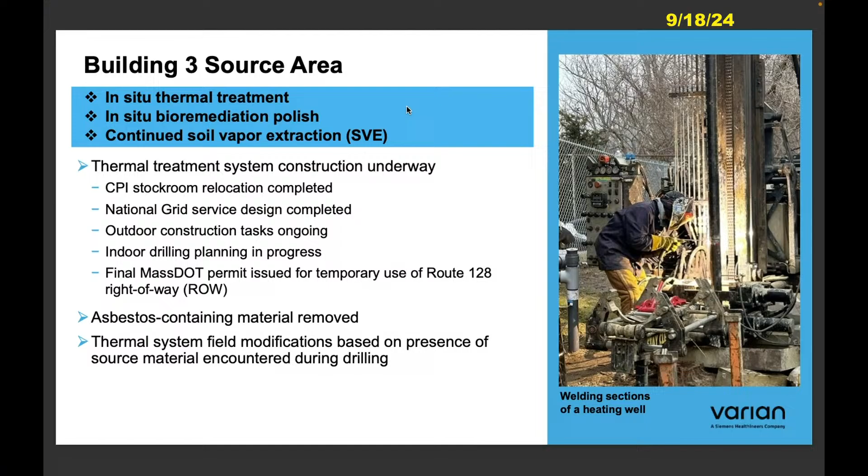The final piece is we're looking to get things moving with modifications to the building's ventilation and heating system, as a result of some of the drilling observations we've made outside. Let's go to the next slide on that.

We identified and encountered this material towards the late portion of May. When we hit it, it was an obvious point to pause because we were getting prepared to do that ACM removal, so we put things on hold. It also identified, when we were out drilling, that we needed to do a little bit more associated with the ventilation around the building and the proximity to the space. We wanted to make sure these provisions were in place before we took drilling operations indoor.

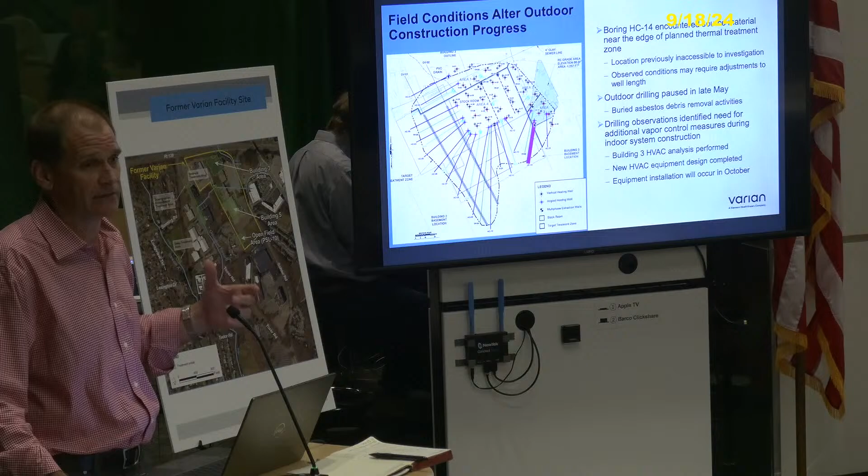HC14 was outdoor, and as a result we've subjected the building to additional HVAC analysis to look at airflow and air exchange. We felt that to get into that stockroom space and maintain safety of the employees doing the work, as well as CPI operations, some changes to the HVAC equipment in that portion of the building were necessary. We're working through the final design phases of that.

The equipment's been ordered. We're looking to implement and get that equipment installed toward the portion into October. Let's go to the next slide.

Overall construction status: the HVAC system is underway. We're looking to restart construction and completion of HC14 and HC13, the two remaining outdoor borings, in the mid-October timeframe. Once we're completed there, we'll take those drilling operations back inside and look to progress the rest of the system construction from inside the stockroom.

Some work will be occurring along 128 in the weeks ahead to move that fence line and do some grading to prepare space for the overall staging of the remediation equipment. Once we're back into the stockroom, our drilling operations will begin, looking at about a 6-month duration to get that indoor drilling work done.

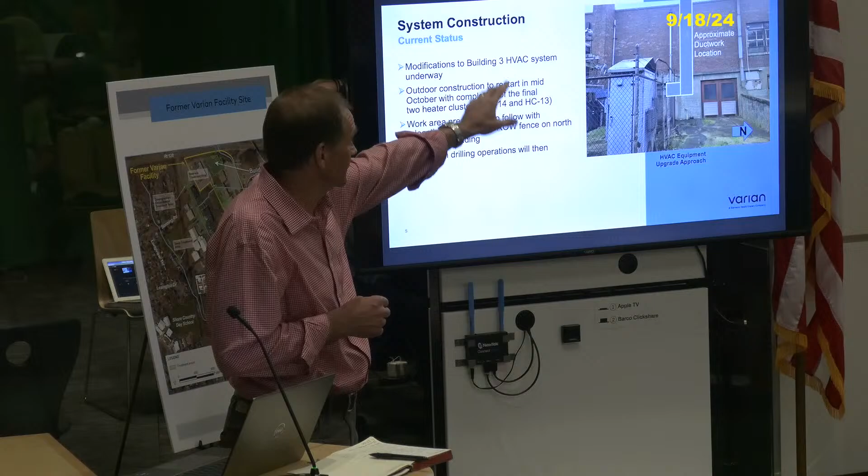This is a schematic of the ducting, which is going to come up the side of the building, up to the roof to move as part of the ventilation and air exchange systems that we felt were necessary to get into this building space.

But this is down at the basement level. The HC14 boring originates around where that north arrow is, projecting underneath the foundation and diagonally in under the space. Very constrained space to get in there, but we wanted to make this change before we got any further along, and the asbestos abatement really gave us the opportunity to get in and do this.

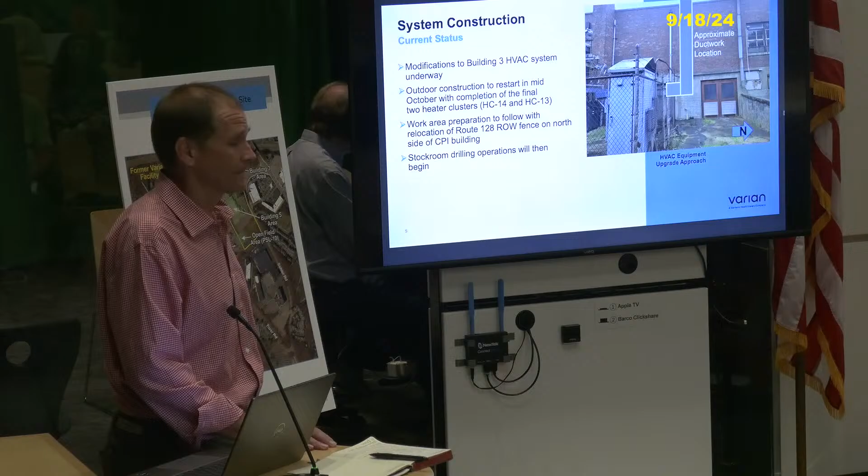So now we're ready to move forward to wrap these locations up and then move inside. So, Lauren, thank you.

Hi, for those of you who haven't met me yet, my name is Lauren McKinley. I'm also with Jacobs, and I am the project manager for the Tozer Road portion of the project. So I'll be talking to Tozer Road, and just as a reminder, Tozer Road is right here.

It's down gradient of the source areas. So as a reminder, the remedial option that we will be implementing at Tozer Road is a permeable, reactive, and adsorptive barrier. And this bottom diagram shows how this barrier will work.

In this diagram, the barrier is depicted as the purple oval, and groundwater flow is shown as the blue arrows. So as groundwater flows down gradient from the source areas, it will move through the barrier, and when it hits the barrier, it will trap the contaminants, treat the contaminants, and allow groundwater to flow through. It's important that this isn't going to stop the groundwater flow. It's going to allow groundwater to continue flowing through, but treat the contaminants and stop them from migrating further down gradient beyond Tozer Road.

So in order to get to the installation of the barrier, there's things that we need to do. We need to conduct some investigations that will provide us additional data. So we've collected high-resolution data, soil and groundwater data, and we're still continuing additional investigations. Once we have all that data, then we'll be able to refine the design of the barrier.

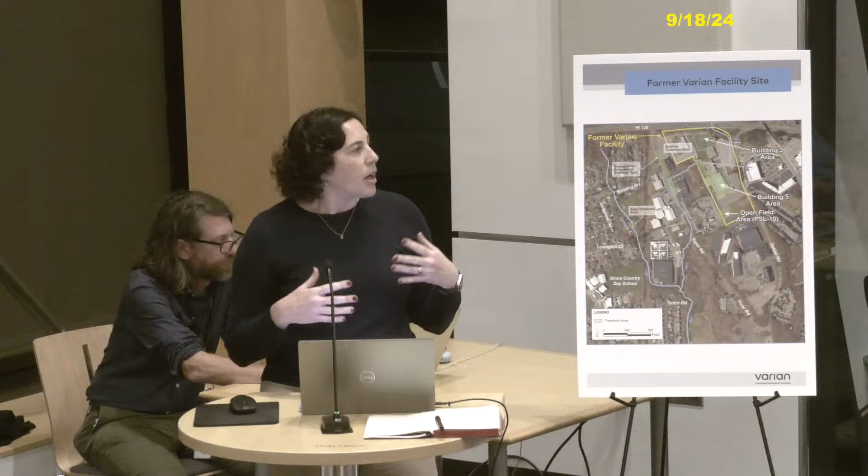Once we know the location of the barrier, then we'll be installing some new monitoring wells, both up gradient and down gradient of where this barrier will be installed, and these will serve as performance wells. We'll collect groundwater samples from these performance wells so that we can get a baseline sample and compare that once the barrier is installed.

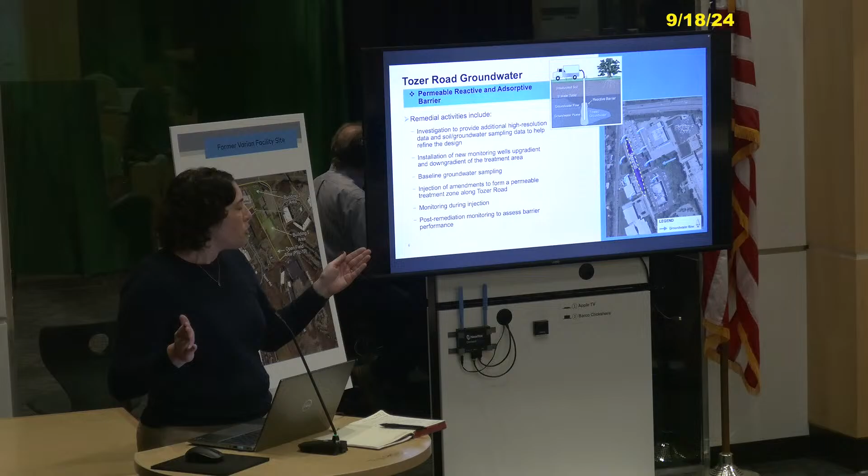We'll then begin installing the barrier through injections. The top diagram illustrates how the injections will occur. In the area where the barrier will be installed, we'll be drilling approximately every 5 feet down into the water table, and through these boring points, we'll inject the amendment into the subsurface. The spacing is such that as this amendment is injected at different points, it ultimately overlaps so that you end up with a permeable treatment zone in the area of injection work.

We'll be monitoring the whole time that we're doing this injection work. And then once the injections are complete and the barrier's been installed, we'll go into what's called post-remediation monitoring, where we'll collect groundwater samples from the performance wells that we had installed prior to the barrier installation. Next slide, please.

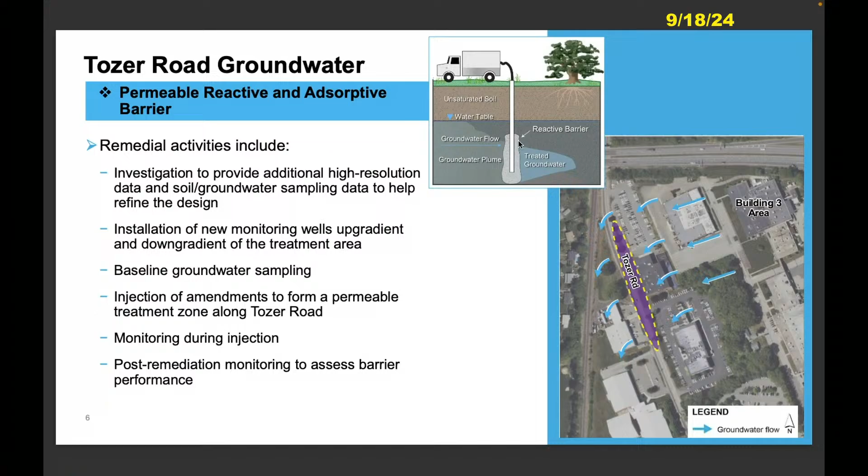So right now we are in the midst of pre-design investigations. This is important. We need to get additional data so that we can refine the design of the barrier and make sure that we're installing it in the optimal location to treat the groundwater as it flows down from the source area.

To date, we've completed what's called a membrane interface hydraulic profiling tool investigation, which is a mouthful, so we refer to it as MiHPT. This was done over a long span of Tozer Road, from 16 Tozer Road down to 39 Tozer Road. This is where we collected a lot of high-resolution data, and it gave us information on contaminant concentrations, distribution, and how groundwater was flowing.

Following that, we went back out and did some additional drilling activities. We installed 7 temporary soil borings through a method called direct push technology drilling, shown in the top picture. When we did these temporary borings, we collected groundwater and soil samples, and that picture shows us purging some groundwater before the collection of a groundwater sample.

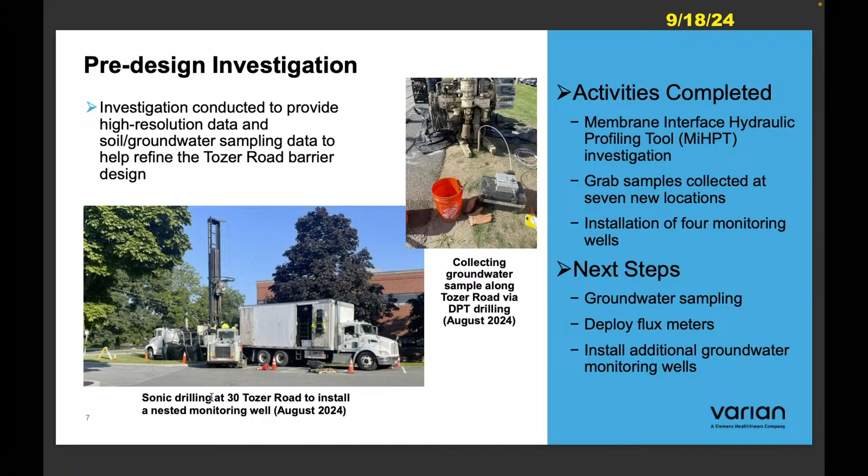So next steps, some of the next immediate steps we'll be conducting is going back out to collect groundwater samples from the newly installed wells and some existing wells. Once that's complete, we'll be deploying flux meters down 4 wells. These flux meters will stay in place for 2 weeks and collect data that will help us understand where the greatest mass of contamination is flowing through Tozer Road. That work will be conducted in October.

Once that's complete, we'll have all the data we need to refine the design of the barrier, and at that point we'll know where the optimal place for the barrier to be installed is. Then we'll be able to install the additional groundwater monitoring wells, which will serve as the performance wells and collect our baseline samples. So that's the update on Tozer, and now I'm going to pass you over to Carol.

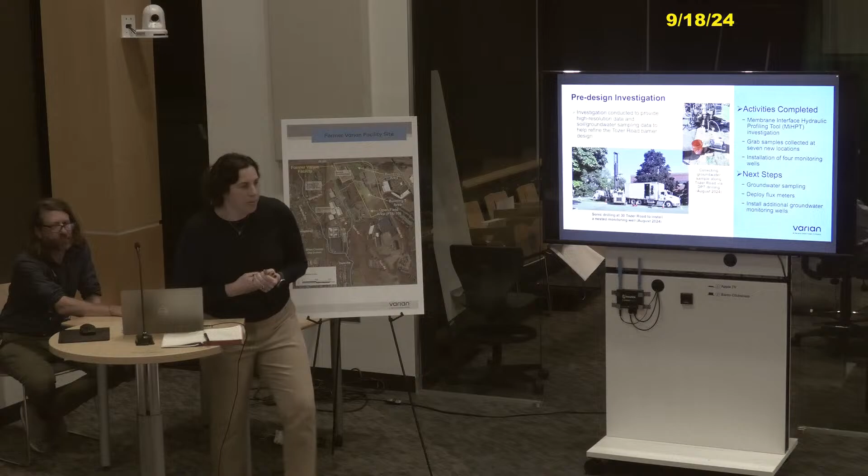Thanks. So I've met many of you. My name's Carol Mauder, and I'm the Senior Technical Consultant on the project. That means I'm engaged on all these different projects and technical oversight on the different sites, but I'm going to specifically talk to you tonight about PSL 10 and then the update on the bedrock work.

So PSL 10, as a reminder, is at the southern end of the site, south of Building 5, in that open parking lot. We're going to be constructing a subgrade biogeochemical reactor. We've made some progress here in that we've selected both the driller and the civil contractor that's going to do the installation for us.

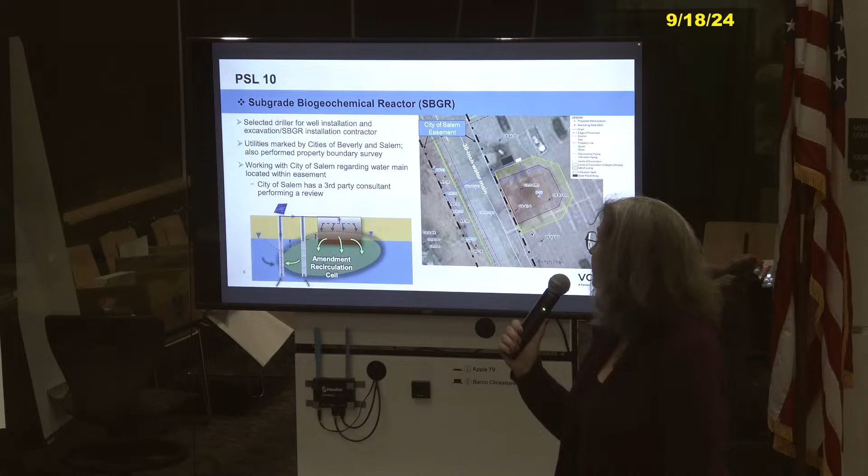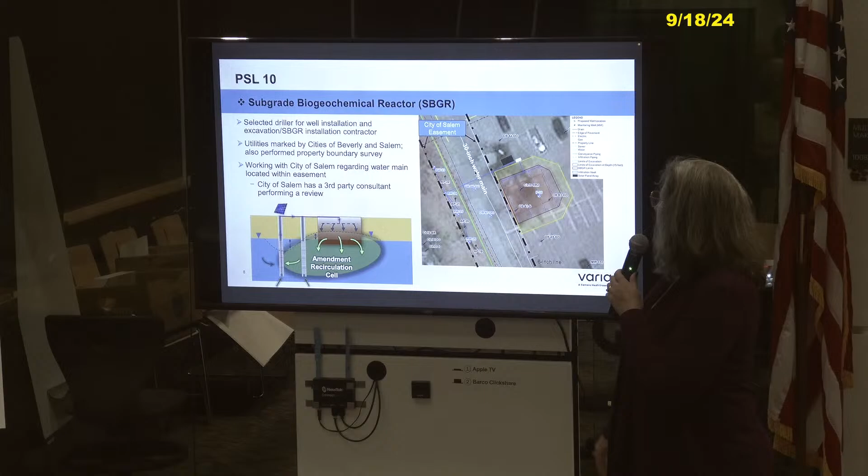We've also had the utilities in the area marked as well as the property boundary. I want to point out the dashed lines here—that marks about a 50-foot wide easement for the city of Salem. I also want to point out we've got a 30-inch water main, some monitoring wells and extraction wells, as well as conveyance piping that's going to go through that area to the subgrade biogeochemical reactor.

With that being installed in the easement, the city of Salem has asked to have a third-party consultant do a review of the work. So that's where we are now—we've got folks under construction to do the implementation, and we've given the city of Salem our design work, and they're going to have a third-party consultant do a review.

They anticipate it taking about 3 weeks to do that review. We don't know yet what kind of comments they're going to have, but we are hopeful that we'll be installing this still this fall, going into December, and be operating later this year. But we're on hold right now until we get comments back. So that is the update on the SBGR at PSL 10.

Next, I want to talk about bedrock, and we've got a bit more of an update here. The bedrock area we're looking at treating is right here, in the middle between Building 3 and Building 5. It's an area where contaminants from those original source areas have flowed down gradient and gotten into the deeper bedrock.

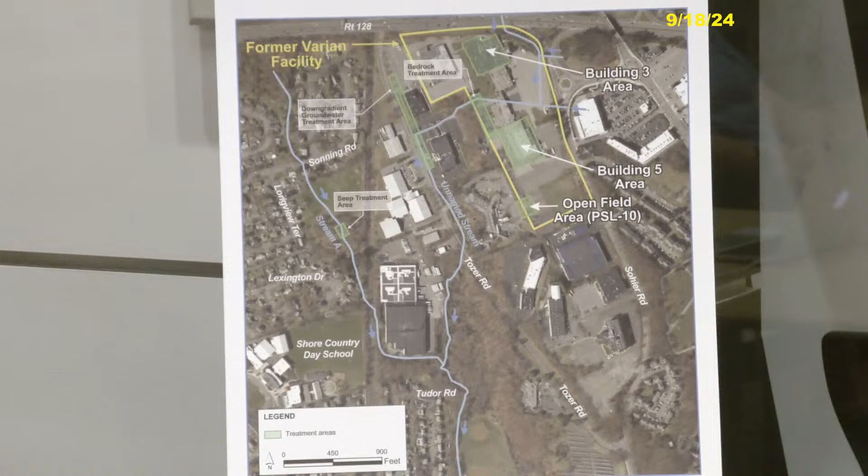In addition, we do some downhole testing in those bedrock cores, and what we're looking for are indications of where there might be fractures, where contaminants could be moving, where there's water flowing, or maybe just fractures where there's not a whole lot of water flowing. Based on that information, we do a Packer test. What a Packer test is, we put some equipment down the hole.

We'll put inflatable packers to isolate above and below a zone that we're interested in. We'll then start pumping water from that zone, and we measure how quickly water comes back in and replenishes it. That gives us a quantitative measurement of how much flow we have in a fracture, or don't have.

Once we do that, we also collect a groundwater sample from that zone, so we can determine not only is it flowing, but does it have contamination in it or not. We'll then determine which zones in that bedrock core we want to install our monitoring wells, what zones we're going to monitor, and where we want to do our injections. So that's all part of the pre-design investigation.

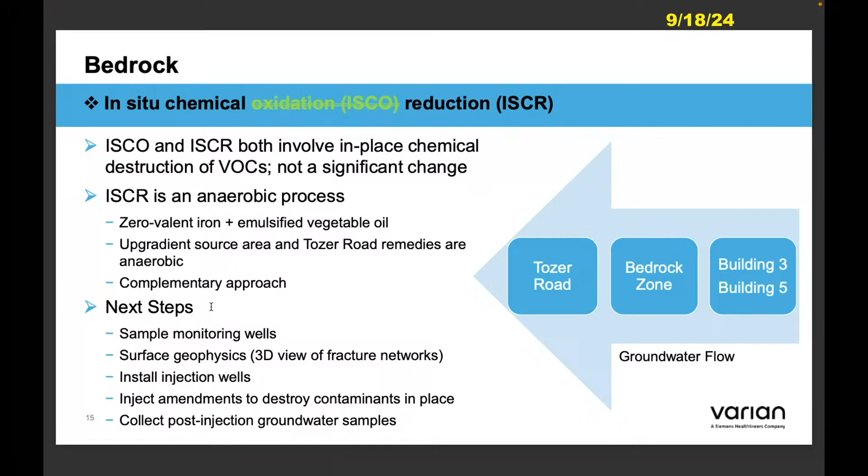As far as next steps, we've installed our monitoring wells in some of the key zones. We'll be doing sampling, and some additional geophysics. We did downhole geophysics, but we're going to do some surficial geophysics to look at how these fracture networks connect to decide the final location of our injection wells. Then we'll be injecting amendments and doing our monitoring. We anticipate installing our wells later this year, both the injection and monitoring wells, and then early next year, in winter, doing our actual injections of the amendments.

And that's it for the bedrock. I'll be handing this over to Raymond.

So that was a lot of information, so we appreciate your attention. We're kind of heading into the home stretch here. I'm going to talk about Building 5, and as Carol mentioned, Building 5 is also an area where we're doing bioremediation using emulsified vegetable oil and zero-valent iron to act as treatment.

In this area, we're going to be installing some additional wells as part of our pre-design investigation, but we're combining that with treatment at the same time. So we're looking to utilize treatment and investigation simultaneously. To do that, we're going to do a pressure injection of the amendments Carol talked about, the zero-valent iron and the emulsified vegetable oil.

Because we're doing that pneumatic pressure injection, the first step was to take a look at the building and make sure there weren't any structural issues that would be concerning. We're going to use vertical wells installed outside the building, and also fans of wells installed from outside the building at angles underneath it. So there'll be pressure injection at an angle under the building, and pressure injection right next to the building. It'll be done at depth, but we still wanted a professional engineer to go in and take a look structurally to see if this would be an issue.

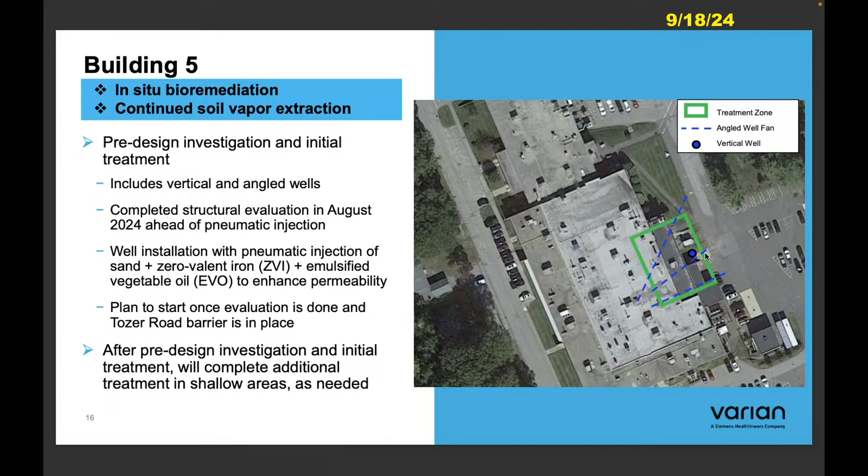So that is done. We plan to start this work once the more down gradient treatments are in place, because this is a pressure injection, it has the potential of moving stuff around. So we want to make sure those further down gradient treatments, whether it's the bedrock or the Tozer Road remedies, are in place before we do this pressure injection. That will happen in the near future once those things are in place. Again, we'll be doing that pre-design investigation and treatment at the same time.

Down the road, we'll also be doing a second round of treatment in this area, some shallow treatment that will probably happen in the spring of 2025.

The last treatment area to talk about is the reactive core mats at Stream A. We've talked about these a couple of times before. These are two carbon filter mats essentially put over the seeps seen on the edge of the stream bank. That was done last fall. We've continued to monitor those mats to make sure there's no erosion and that they're still in place and functioning as they should be, and that monitoring indicates they're still functioning as designed.

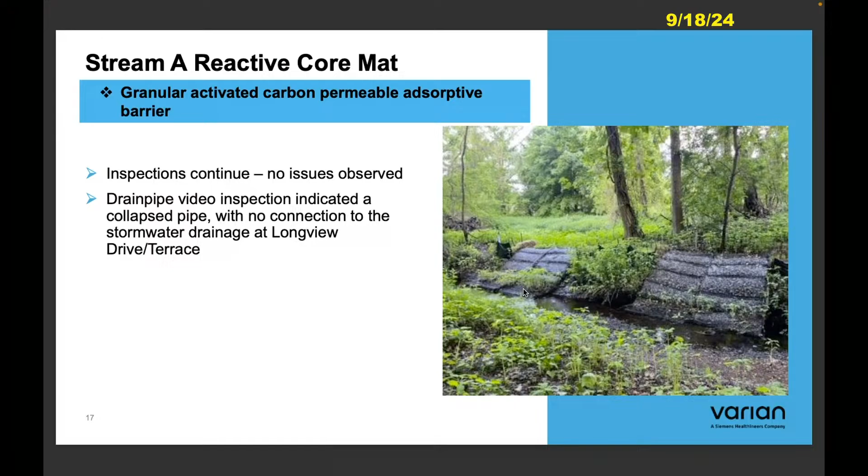We also talked about in the last couple of meetings a drain pipe we found during installation of one of these mats. We did a video inspection of that drain pipe, and as we expected, we found it was an old drain pipe. It's collapsed and seems to be getting groundwater in it, so it doesn't pose any issue we need to be concerned about.

We also looked at some drains that were in Longview Terrace and Longview Drive, just to make sure those were not drain lines heading towards the stream and part of this pipe system, and that was not the case. That work is being done, and that information is included in the status report we just submitted.

Lastly, we are continuing to do monitoring of the stream itself. We're sampling stream water upstream and downstream of these mats. There's also a shallow well right next to the mats that we're monitoring to make sure things are not changing in a manner that's going to be of concern. Ultimately, we want to show these are changing as upstream remedies are implemented, in a positive way, and that monitoring will continue as we move forward.

Next slide. So up here, we have an estimated schedule that we've put together for each of the treatment areas. You'll see information about design, when system installation is going to happen or if it has started, when the start of treatment is expected, as well as ongoing monitoring of treatment.

You'll see that the design for the thermal is complete, installation is in progress, and for some of the other ones also. We expect the next one to be implemented will hopefully be the SBGR this fall, once we get through that review by the city of Beverly.

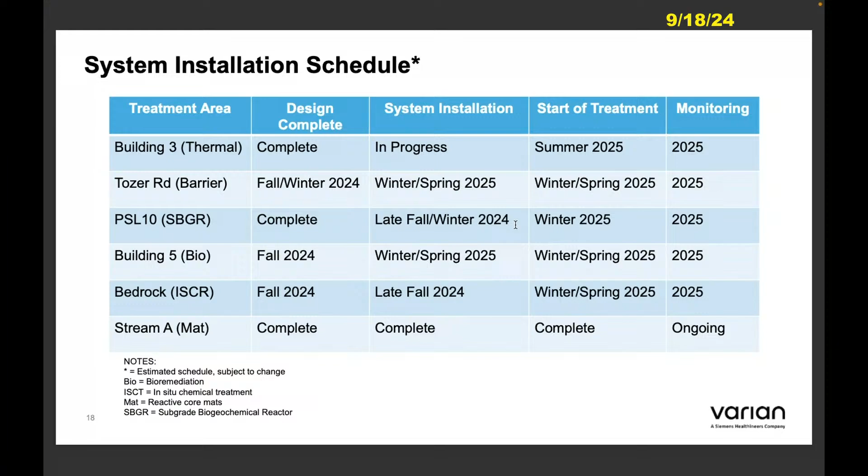For those of you who have not met me before, I'm Amy Brand. I'm a public outreach specialist for Jacobs. I just wanted to cover what reports are available and coming up, and how to find more information.

This presentation was an overview summary of the data in the revised Phase 4 status report, issued in August. It's available on MassDEP's website, shown at the bottom. There's also a hard copy at the reference desk at the public library. And those status reports, as we mentioned at the very beginning of the meeting, will come out every 6 months, and we intend to have public meetings coinciding with them to present the status of the treatment systems.

Also coming up for public comment and review, we mentioned the asbestos abatement. This is basically a completion report, so we'll send out a public notice when that's available for review. There's a 30-day public comment period on that; if you want to read it and submit your comments, you're welcome to do so. There will not be a public meeting for that per se. Again, that will be at the Beverly Public Library and on the MassDEP website.

Speaking of websites, if you haven't been to our project website that we set up, the information on the right-hand side, we update the homepage monthly with the treatment progress that's going on. And if you're on our email list, you may get that by email as well. The same information goes onto the homepage of the website.

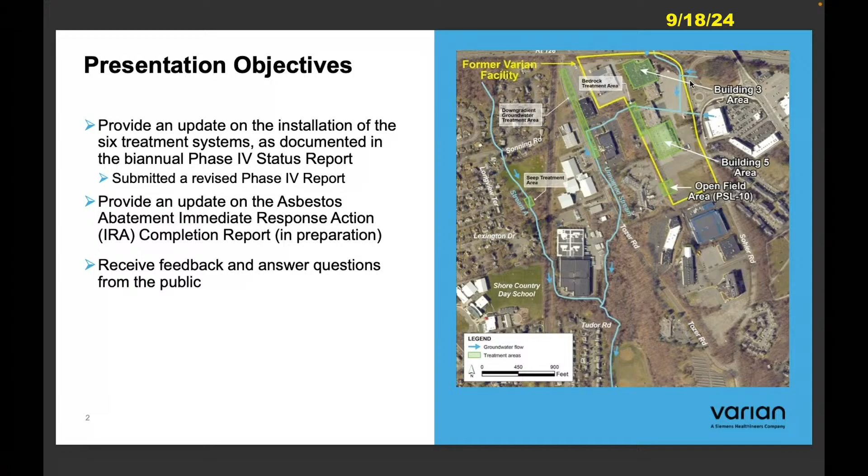And I would say with these more transmissive fractures, doing the reductive approach, which includes that zero valent iron, is better—not only because of the anaerobic conditions up gradient and down gradient, but also because that zero valent iron sticks around longer, whereas a liquid injectant like the permanganate is going to flow with the groundwater. So this gives a treatment that's going to stay more in place and treat as other groundwater flows through there. I would say it's a better approach with these more transmissive fractures.

They are complementary.

So going back to the heating treatment and stuff, we talked about some modifications that needed to be done as far as CPI, both the air and HVAC and that type of stuff, and a few other things you found. Is that going to do anything with our timeline as far as what you're projecting for it to be done?

No, not necessarily. It is affecting our ability to get into the stock room and start that indoor drilling, but looking at it from our observations with 14, it allowed us to get a lot of additional provisions in place to really assure the safety of the operations in the space. Spatially, we're talking about putting one of those drill rigs in a room probably not much bigger than these columns, and angle drilling.

It's a diesel operated machine, and there's solvents in the subsurface—we know that's the case, that's why we're there. So that additional air exchange capability, the additional treatment capacity offered by these supplemental pieces we're bringing in is going to pay itself forward. As far as schedule, it's still running the same duration to get it done. We're just getting a later start into the building than initially envisioned, giving us about 6 months from when we basically get indoors.

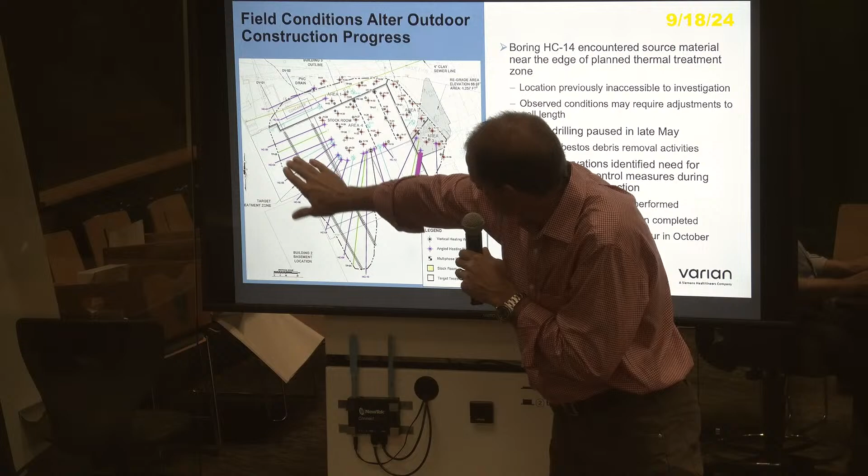Everything else to my left, which would be to the west, is indoors. This is the stock room I spoke of earlier, the area we now have access to after the renovations took place, and we were able to vacate CPI's equipment. This particular boring that you asked about, Jenna, was a horizontal boring run at about 28 degrees, if I remember correctly—fairly shallow, fairly long, diagonally underneath the building, underneath the basement, because this area of the facility has a subsurface basement, so we were down below the foundation. Very shallow angle, very far out.

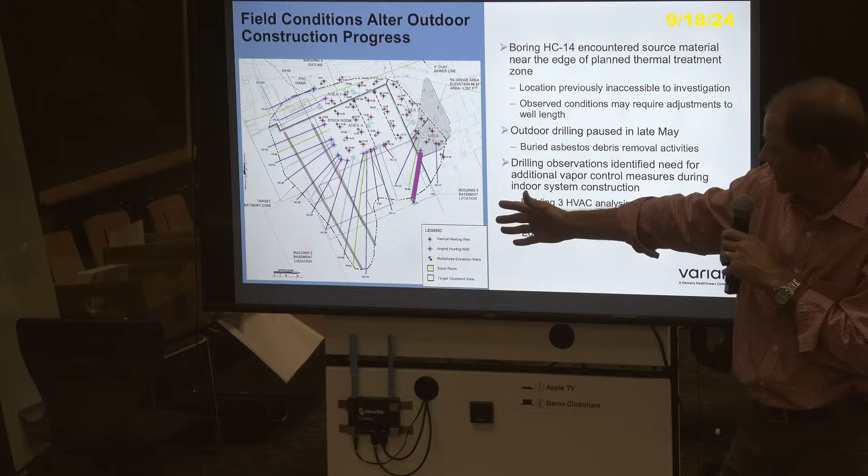Towards the end of where this boring was terminated, we actually picked up some additional solvent, additional source material. When we see these types of scenarios, source material anywhere inside this box is generally fine because you've got a heated boundary—the heat takes care of it, the heat helps drive that contamination.

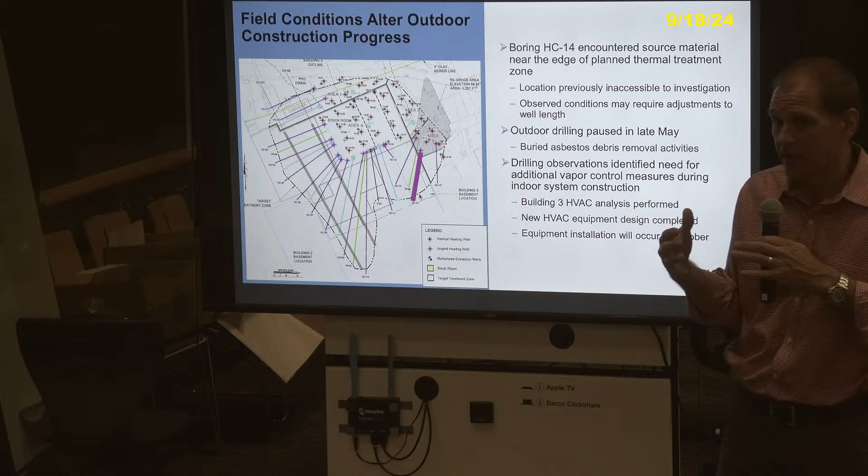Encountering the material on the edge of the treatment zone is requiring us to reconfigure and relook at potentially extending this boundary, to include a little bit more material here to ensure we've got a heated envelope around that material. It's a bit of a challenge because this area of the facility is very heavily spatially constrained. You might ask, why didn't you come in from this side here to attack that as part of the overall system construction?

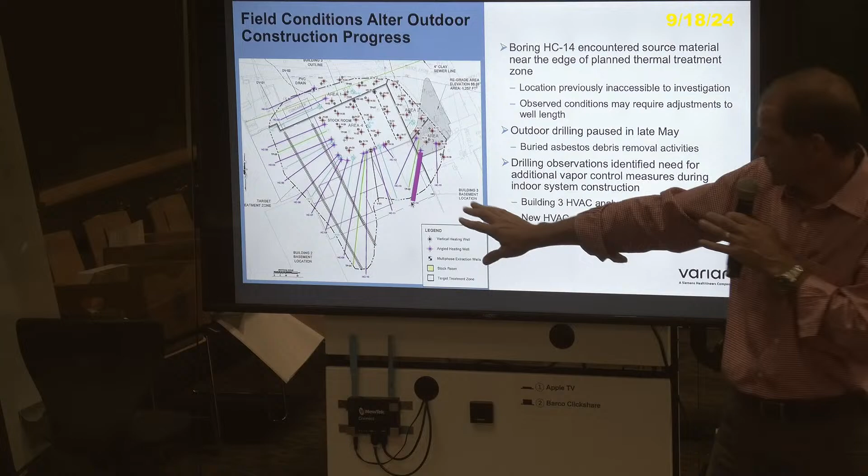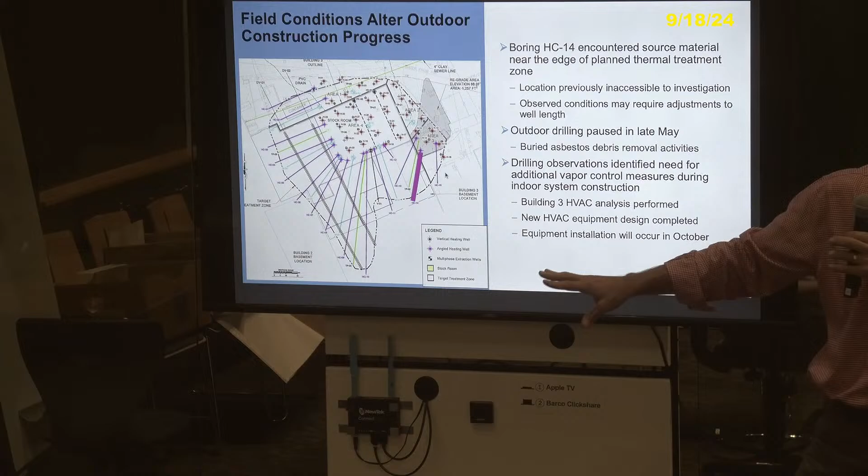There's no physical way to access that portion of the facility. There's loading docks. It would be massive demolition of existing infrastructure. We talked a lot about this in the design of this system. If there wasn't a building here, this would be a pretty easy problem to solve. But we don't own the building. We have to work around the constraints of that space.

As a result, this boring is being advanced really from a very small alley. In fact, on the other side of this gray area is a giant bank of transformers, which provides power to the facility and to itself. There's a fiber optic line in there. There's two gas lines that fuel the boiler. There's a whole bunch of stuff that makes this really kind of a puzzle.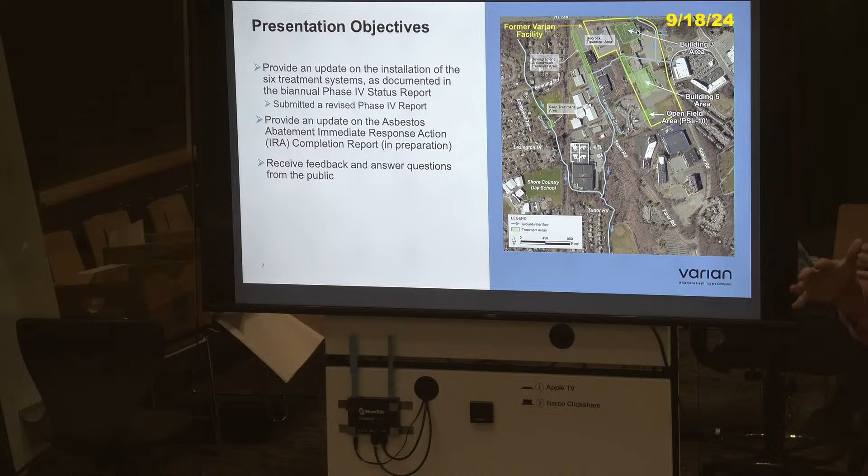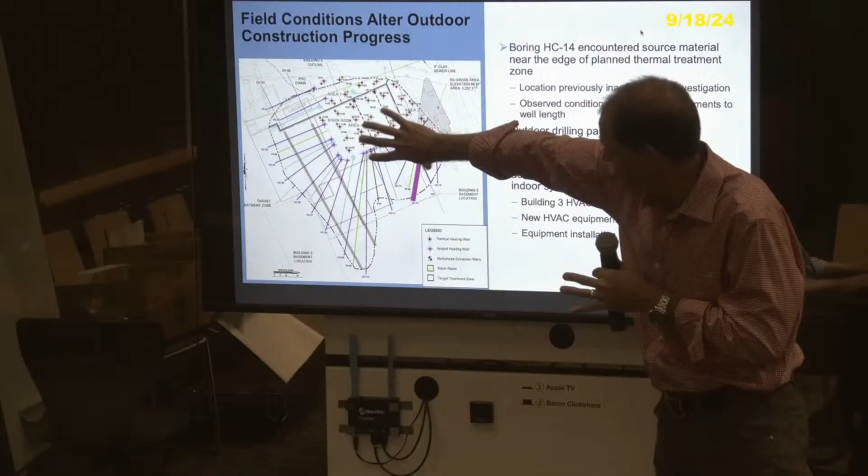At some point, maybe in the tag group, I can bring up the three-dimensional model of what this spatially looks like. It's incredible, it looks like spaghetti. And if you can envision this with all kinds of lines, we flip this up and we've got them now moving at different angles, different distances into the subsurface.

So what we'll be looking at now is being able to reconfigure some of those spatial access points to provide a little bit more heating down at the terminal point of this boring, and then essentially use that as a basis to help drive the contamination. Like the coils, right? These are the heating coils that you put in. Yes.

So to be clear, to generate the heat, you have to have these heating coils implanted, right? Yes. So no problem, or less of a problem, in the building where you've been putting the coils in. Because you encountered this area, what does that do to how you're going to implant the coils? I guess, is that the trick, is that the puzzle? Actually, the puzzle piece is the hole that the coils are placed into.

So when we drill a boring to install that infrastructure, it's steel. It's a steel pipe, it's sealed. And then the heating coil essentially goes inside of that steel pipe. So right now this steel pipe isn't completed. It's not at its final depth. It's not in its final space.

The angle and the length of the boring is set, but we have the ability to go further, or to pull back. We may even potentially seal this one up, and rather than use that space to take this particular angle, we may reconfigure and come in at a slightly different angle to reorient the heaters themselves.

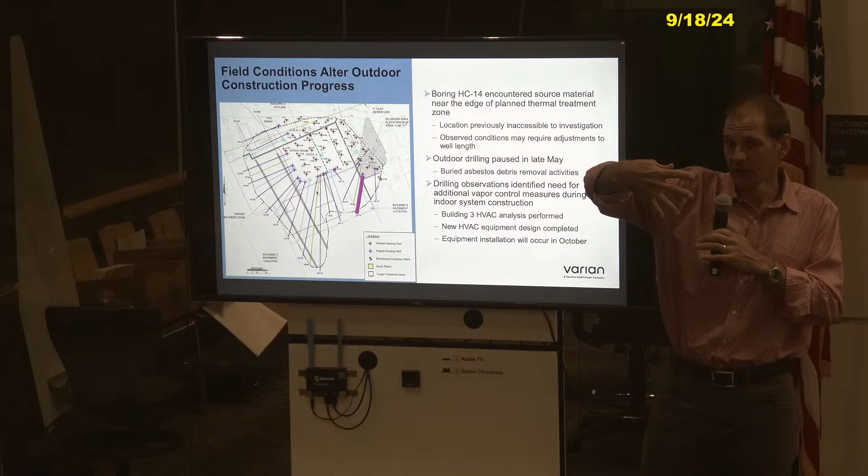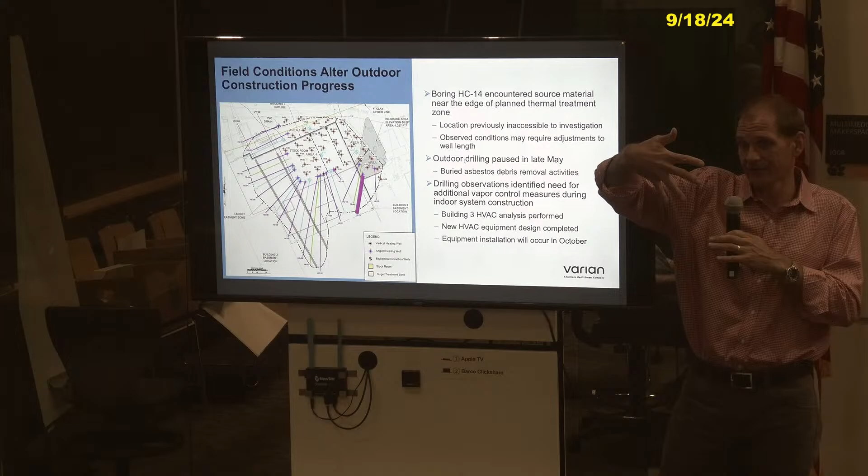So while this may represent a single line, HC14, it was actually HC14B. It was the second of 5 borings associated with HC14 on that angled fan, which allows us to heat down to the desired depth and into the desired spatial piece. So the three-dimensional space is kind of crazy when we get into working with these angled systems.

Again, it just speaks to the complexity of trying to treat underneath the building space, an occupied building space as well. So we're evaluating the options we have and how we can reconfigure. The other competing factor is that if you look where this HC12 is and comes across, there's actually a building - there's another story down below the stockroom. So we're dealing with a couple of different elevation planes in which these borings are entering.

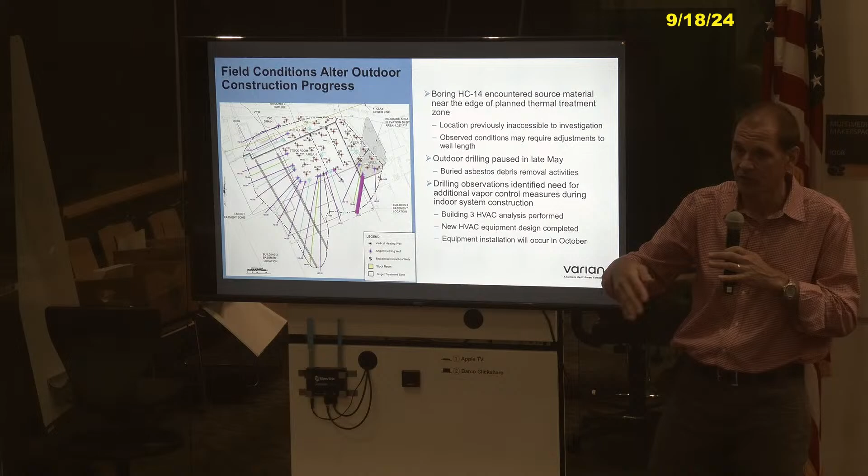So getting that reconfigured is going to take us a little bit of evolution, especially being able to fit it within that stockroom. So, long answer to a fairly simple question.

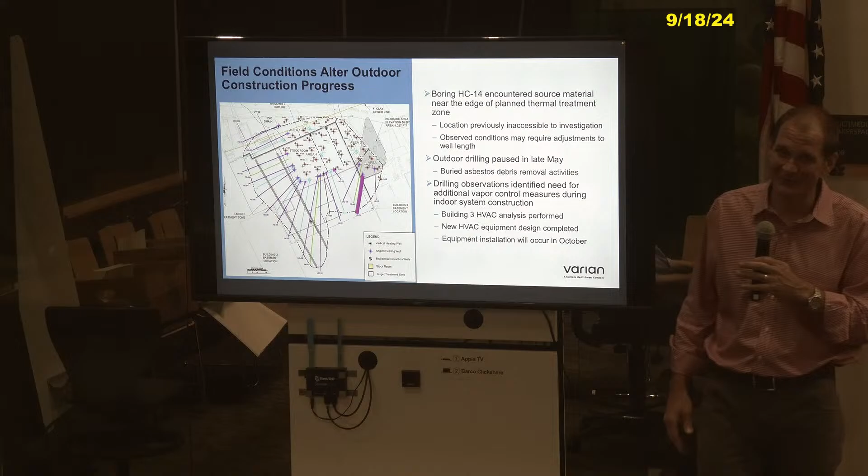Other questions? Barrett and then Tiffany. I should let non-technical questions be answered first. Well, Tiffany's with DEP. Go ahead, Barrett.

My question was about the HC14 borehole. Was the HC14 source material encountered above the water table? No, it's below the water table. Okay, that was an easy question.

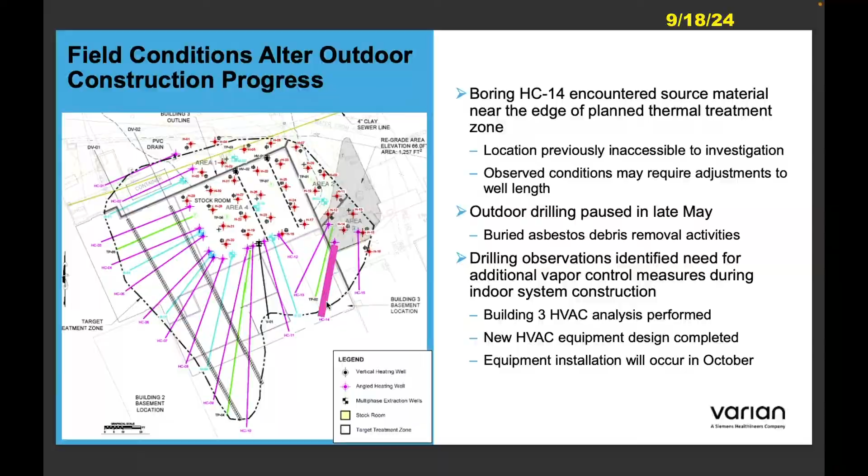No, I mean, they are definitely related, and that's what drove it. I just didn't know if when you were pulling core from HC14, was that when you were getting the spike? Yeah, it was. Okay, it was. So that was related, that's what kind of caused it. Yeah, we got the engineers talking to each other now. If you're not following, that's okay.

As we've mentioned in prior presentations, in preparation for work inside of CPI's building in the stockroom, we installed a continuous gas chromatograph, a very sensitive piece of equipment to monitor air concentrations inside the building space in 10 different locations. That system was moving along, collecting baseline data. We were getting ready to wrap up the drilling operations. 14 was the last location we were going to do before shutdown to support the asbestos removal work, because 13 is essentially right next to where the asbestos was identified.

Late in the day, they were pulling core from one of the deepest locations. We pulled the core, and shortly thereafter were notified by the chromatographic platform that basically a blip of solvents characteristic with what we saw in the ground showed up in the indoor airspace. Now, putting all the pieces together, there's about 10,000 cubic feet per minute being drawn into that basement space.

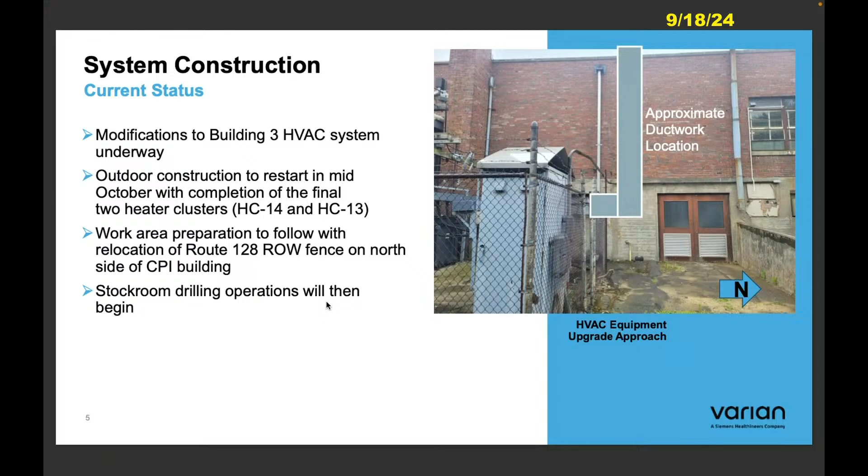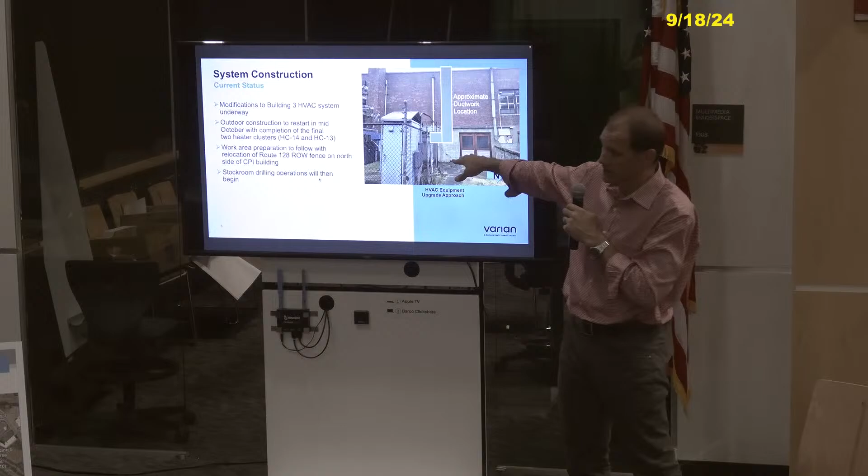And maybe Laurent, the next space. Yes, so in between these louvers, this is the basement space of the CPI facility. Behind these doors is a huge air compressor that supplies compressed air to the entire building and all of their operations and machinery. The drilling was taking place out here. This device is basically pulling outdoor air into the space, part of the challenge. The other issue is up along this bank of windows, there were a series of air ducts and air exchangers that were also in communication with the outside ambient air.

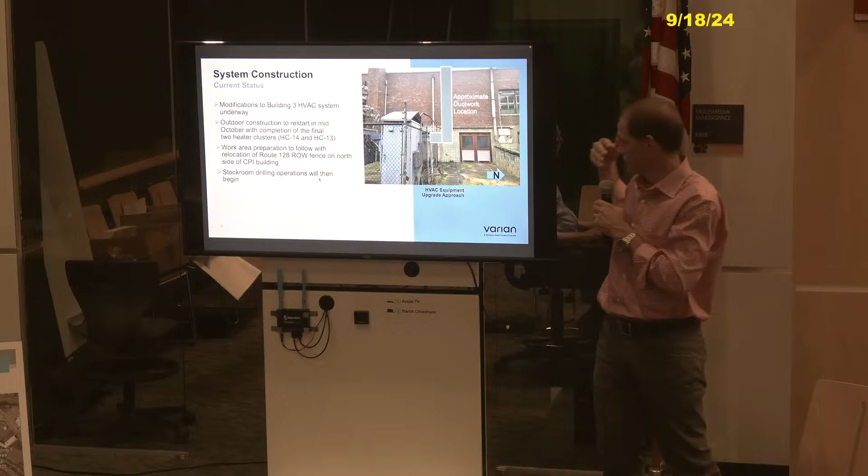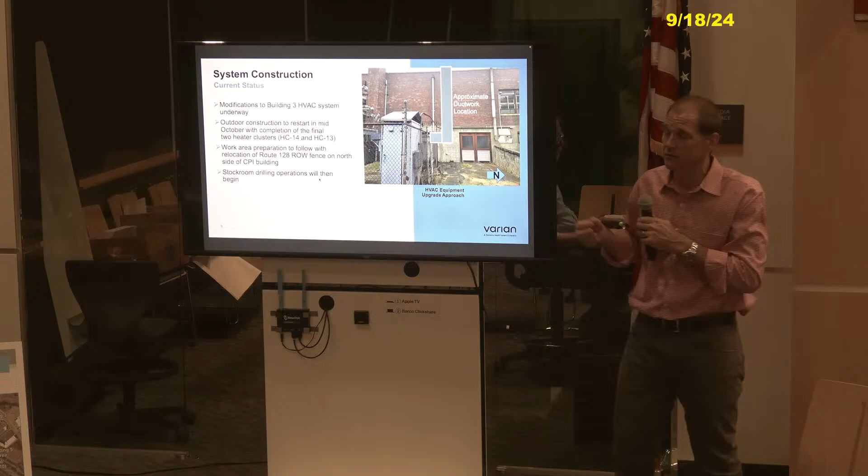So when that source material present in the core came up, it was enough to pull vapor in, and the instrumentation installed to do that indoor air monitoring is sensitive enough that that minuscule amount from the outdoor air being brought in was enough to register. So that to us was an indication that we needed to do more, that we needed a few more provisions in place. So in parallel with this asbestos shutdown, we've been working through the basis of monitoring, sealing, air exchange, and changes to the overall HVAC balance in the building.

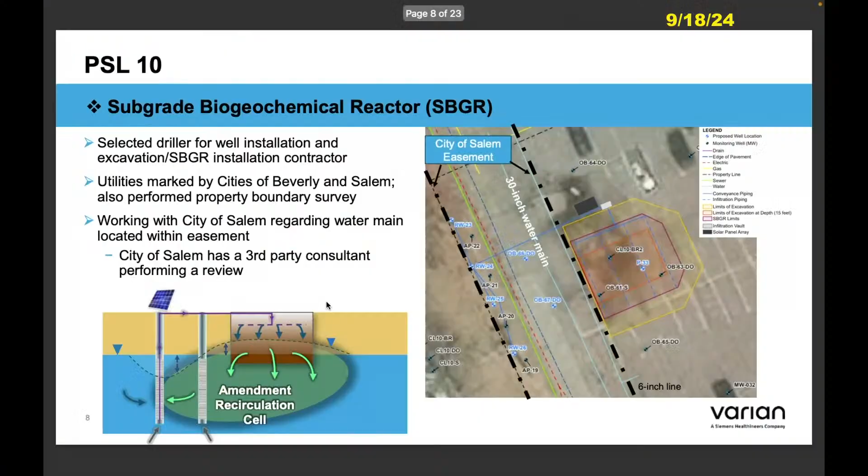Carol, can I ask you next? Absolutely, so my next question is regarding the TW9 borehole. I was interested in, I guess my questions are twofold: were the transmissive zones identified solely on the basis of water level recovery during the Packer testing, or was there

heat pulse flow meter data? Yeah, so we started with visually inspecting, and we did downhole geophysics. So when I said we dropped equipment down, we did calipers, heat pulse flow meters, optical and acoustic televiewers. We ran a whole series of things. Based on that downhole geophysics, we selected the zones for Packer testing, combining downhole geophysics with the VOC readings when we looked at the core.

So, for example, I see 65 to 75 and 75 to 85 feet as being two of the Packer zones that were tested. Yep.

Was anything done to confirm there was not a hydraulic connection around the Packers? Yeah, so when we did our Packer testing, we also had transducers at other locations, above, below, and within. We had pressure transducers there and also in some other locations. And it was really interesting, because sometimes we'd do the Packer testing and we'd see a response in a transducer at another well. So it tells us if there's some type of hydraulic connection, not necessarily a flow path, but at least a hydraulic connection.

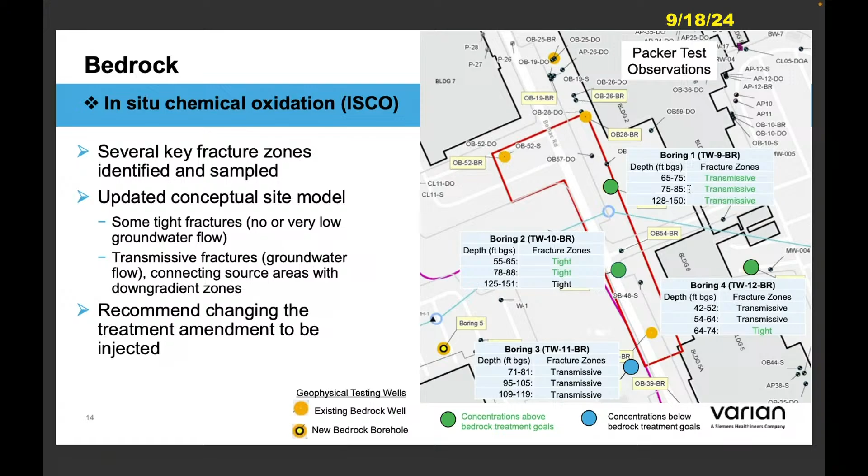Correct me if I'm wrong, Carol, this was the one where we saw a really wide area, maybe 75 to 85, that kind of broke into two sections? I can't remember exactly, we had a couple areas with wide fractures, meaning a lot of fractures or a very wide fracture. I don't remember exactly which one it is, but it'll be detailed when we go through it. We haven't even gotten the geophysical report yet, so we're kind of excited to see them. It was really interesting, we'd do the testing and get on the phone in the evening to go through results and decide where to do Packer testing next. It was a very dynamic process of gathering all the information, so we just don't have all those reports yet.

Something else you'll find interesting, there were some fractures that were horizontal. A lot of our tight fractures were pretty horizontal, but where we had some thick zones, we had some pretty steep inclining fractures. Were they dipping in the direction of the streams? Not necessarily in the direction of the streams, we had some trending one direction but some cross-cutting. There were some that were like 80 degrees, really steep, that were flowing. So it was a lot of really good information to help us with the treatment process.